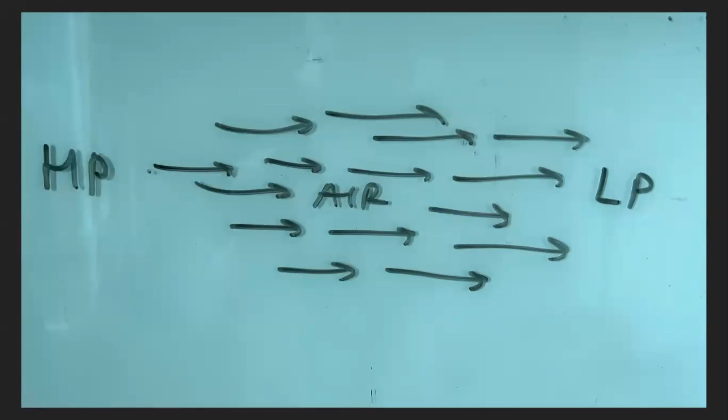To understand the structure of the airplane, we must understand two different concepts in aerodynamics. Firstly, the relationship between pressure and air. A fact we all know is that air travels from areas of higher pressure to areas of lower pressure. Therefore, to deliberately make air move, you have to create differences in pressure. Now, when is pressure higher? Pressure is higher when there are more air molecules making more collisions.

And obviously, when are air molecules going to make more collisions? When the space for the air molecules to move around is less. Essentially, when the volume is less. So, two factors which affect the air pressure are the number of air molecules, which basically means the number of collisions that the air molecules will make, and the second factor is the volume that the air molecules have to move around.

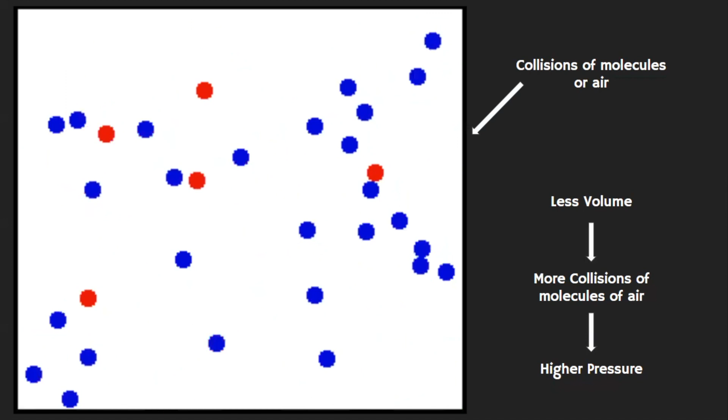The second concept in aerodynamics that will be important to explain how airplanes fly is the relationship between volume and air. Now, when air molecules are in motion and then we constrict them to a region of lesser volume, the velocity of the air molecules traveling increases. Now, to explain that, I will use a real life example.

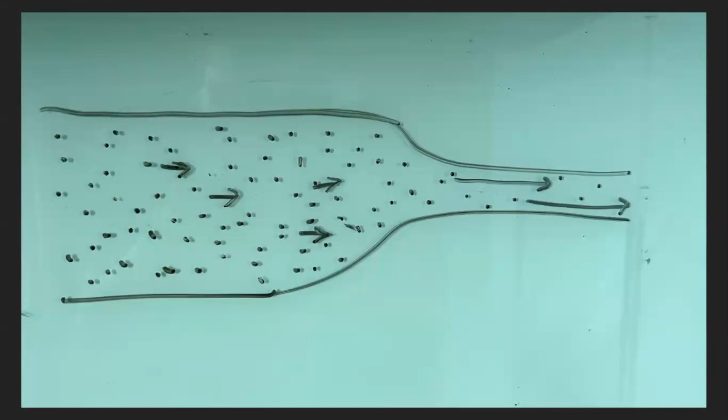When using a garden hose, we put a finger on the cylindrical opening. And then what happens? The water rushes out much quicker. Why? Because we are decreasing the space that the water molecules have to escape the hose. Hence, we are decreasing the volume that the water molecules have to escape. And therefore, water rushes out much faster because we're squeezing it through an area of lesser volume. We're forcing it through an area where it does not have enough space.

Now let's look at another case. When these air molecules in a bottle are being forced through the narrow gap, the neck, they gain velocity and move much faster at the neck of the bottle when compared to the part before. The particles of air at the neck are accelerating, and when they are accelerated, you can see that they're more rarefied. They have space between them. So the collisions between the air molecules decrease.

And if the collisions between the air molecules decrease, then it creates a low pressure zone at the neck of the bottle. And what happens when we have differences in pressure? The air flows from the region of higher pressure to the region of low pressure. So the higher pressure region is where the bottle is, and the low pressure region is where the neck is. So the air flows from the bottle to the neck and out.

So when the air molecules are forced or squeezed through something, they gain velocity, like the water coming out of the hose or the molecules that are being squeezed through the neck of the bottle. And we will see why this concept will matter later in this video. Now, moving ahead with these two aerodynamic concepts in mind, we will see the four forces acting on bodies that are in motion in fluids.

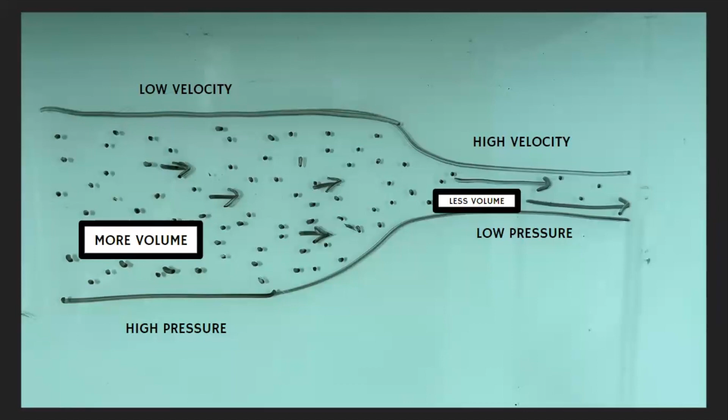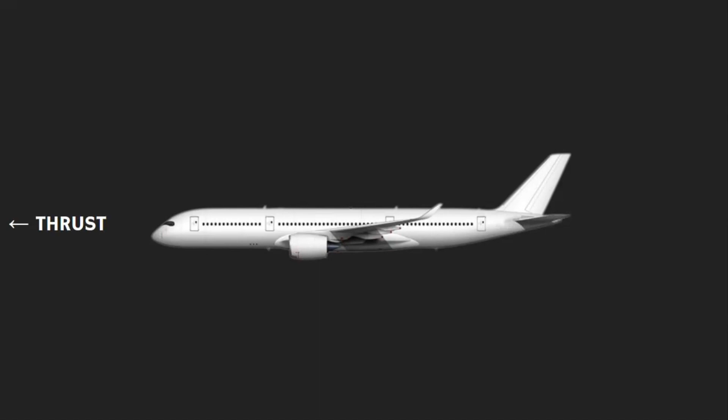Let's consider our body in motion to be our aeroplane that is in motion in air, which is obviously a fluid. So the four forces acting on an aeroplane are firstly, thrust, which is generated by the engines of the aircraft pushing the plane forward. Secondly, drag, which is a resistive force caused by air friction acting opposite to thrust. Thirdly, lift, which is what we will mainly look at in this video. It is a force that allows the plane to fly. And fourthly, downforce, which is another resistive force acting opposite to lift.

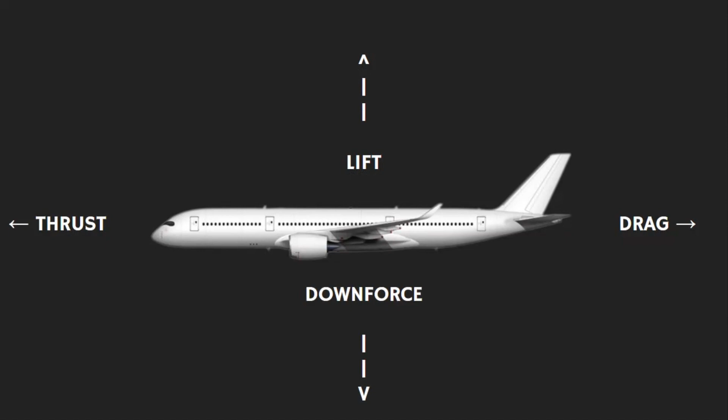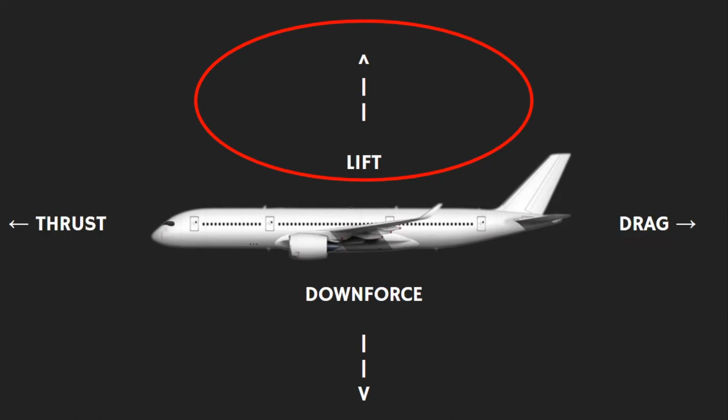Now, the force that helps an aeroplane to gain flight, as mentioned before, is lift. Lift is basically the force that pushes the airplane upward. So it is imperative that the aircraft is designed in a way that it generates lift. We will not cover the other three forces in this video, but they are equally important as they have a great impact on the design of the aircraft. Now, how is lift generated and how does it impact the design of the airplane? The primary way is in the form of wings.

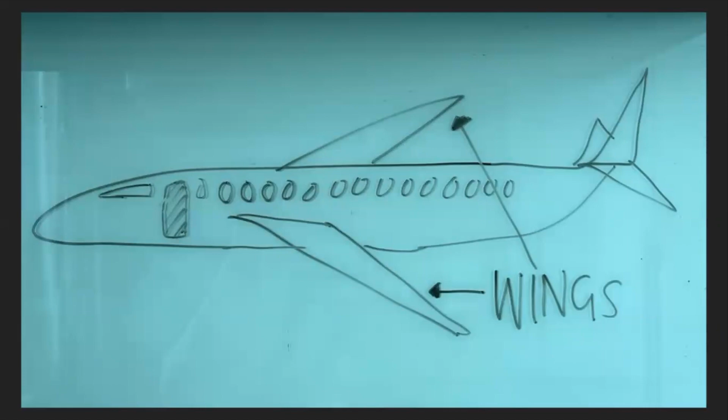To understand what wings are, we must know what airfoils are. Airfoils are structures that produce lift or drag when moved through the air, and the airfoil that is most commonly used is a wing. Now, the shape and design of the wing is responsible for generating the lift for the aircraft. The cross section of a wing looks something like this. Okay, so now how does this design of the wing generate lift?

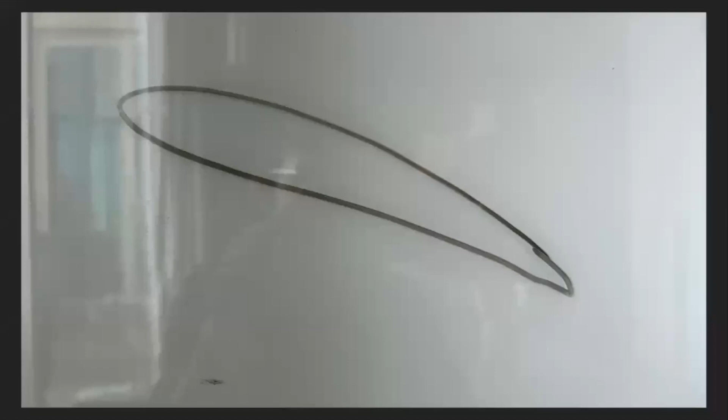Now let's imagine this. This wing is moving through the air. The air will make contact with the wing and the wing will separate the airflow. But how will the wing separate the column of air that it's making contact with? The answer to that question is essentially answering how lift is generated. Wings are designed in such a way that they unequally separate the air that flows towards them and makes contact with the wing, and they unequally separate it above the wing and below it.

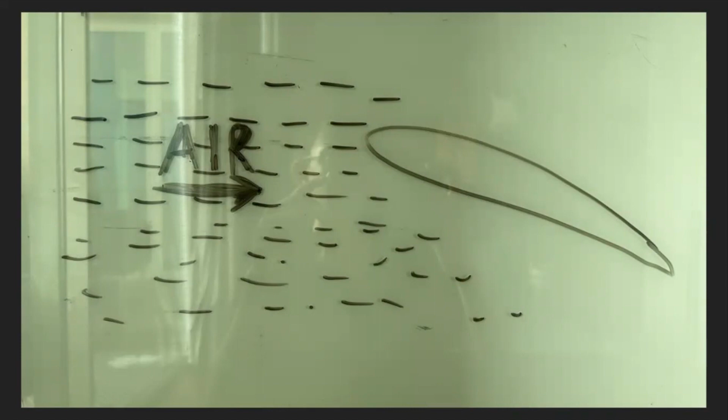So they deviated unequally above the wing and they deviated unequally below the wing. So now, when the air column hits the wing, let's first see what happens to the air that is deviated under the wing. As you can see, the air gets pushed down by the wing in a pretty straightforward manner, as the air flows along the shape of the wing.

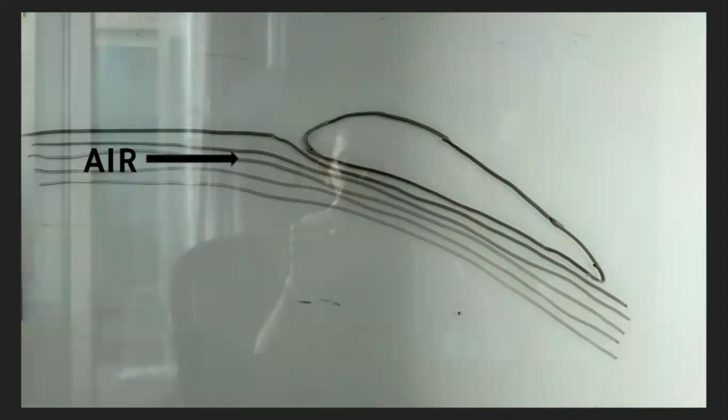But the top of the wing does not have a smooth curve like the bottom of the wing. The top of the wing has a more aggressive, sharp curve. And now let's see how air is deviated at the top of the wing. Now, as you see, at the top of the wing, the air has to take a more aggressive approach around the shape of the wing. And it is deviated at a much, much greater angle than the air column at the bottom.

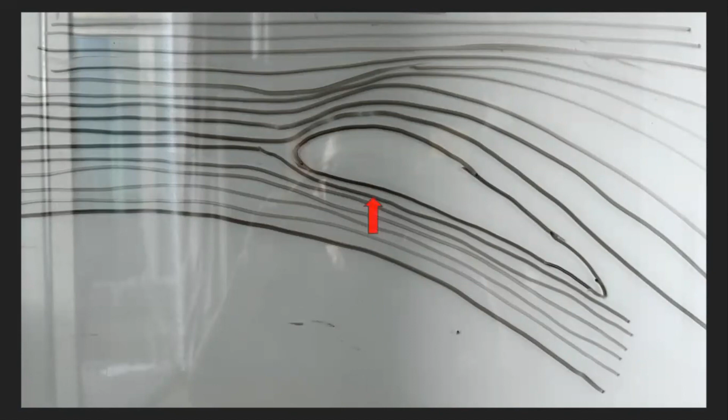This means that at the top of the wing, the air that is flowing is being squeezed between two things. Firstly, the top of the wing, and secondly, the column of air that is undeviated, that is flowing horizontally. So the air is being squeezed to flow between the two red arrows. And from what we've learned before, when the air is squeezed through something, it moves much, much faster. So after making contact with the wing, the air that is deviated upwards moves much faster. And when the air moves faster, the airflow is rarefied, creating low pressure above the wing.

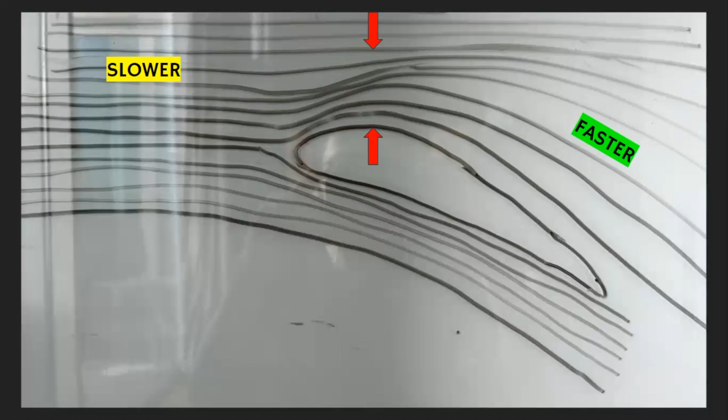And what do we know about differences in pressure? Air moves from regions of higher pressure to regions of low pressure. So the air moves upwards, thereby pushing the wing upwards. And why is there higher pressure at the bottom of the wing? Because when we compare it to the top of the wing, the pressure is obviously higher, because at the top of the wing the pressure is lower because of the airflow being rarefied, because the airflow is being squeezed between the horizontal column of air and the top of the wing.

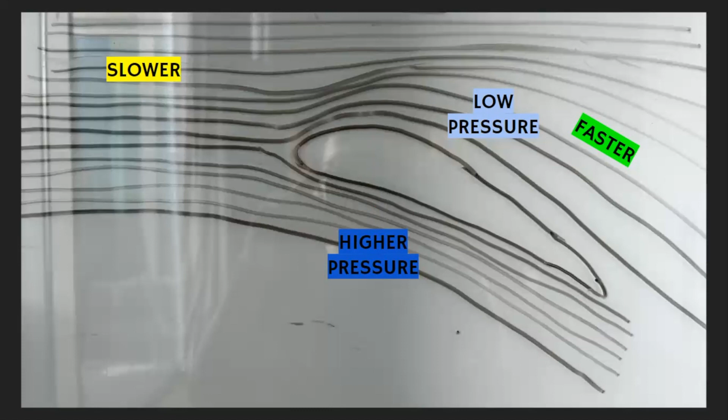Hence, with higher pressure and low pressure, the air pushes the wing upwards. Hence, a force is generated by the air pushing the wing upwards, and that very force is called lift. This lift pushes the wing upwards, essentially pushing the entire aircraft up, allowing it to fly and soar the skies.

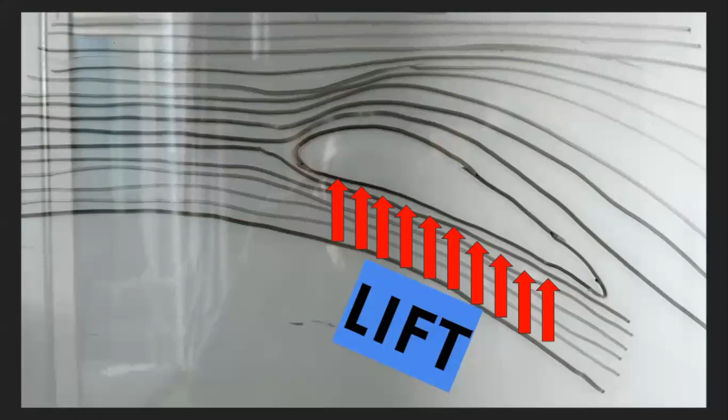Another way that lift is generated is that if we look at the overall deviation of the air after it hits the wing, clearly, as you can see, it is downwards. So the air is being pushed downwards by the wing. And to that, we get a reaction force, and the reaction force is upwards. How do we get that? Through Newton's third law of motion, which states that every action has an equal and opposite reaction. So the action is the air being pushed downwards by the wing, and the reaction to that is the wing being pushed upwards.

So, therefore, through differences in pressure, along with the reaction force on the wing, lift is generated. This lift pushes the wing of the aircraft upwards, which pushes the entire aircraft up, which basically enables it to fly. And that is why the design of the airplane generating lift is so important.

There are also certain other ways in which we can increase the lift force produced. Firstly, by increasing the speed of the aircraft, which is done by the engines, which generate thrust, one of the four forces we mentioned before. So if the thrust generated is higher, if the velocity of the aircraft is higher, the lift generated is more. Therefore, the aircraft can fly higher. This is why fighter jets, which travel at insanely high speeds, can perform maneuvers that passenger jets cannot, because these fighter jets have much more powerful engines, so they generate much more thrust.

Another way we can increase the lift is by changing the angle of the wing. Because the more aggressive the angle is at the top of the wing, the greater the angle of deviation of the air, and the more the air is going to be squeezed. So the greater the difference in pressure, and hence the more lift that is going to be generated. Now, we have certain devices on the airplane that can help increase the lift generated in the two ways we've mentioned above. Firstly, we have flaps.

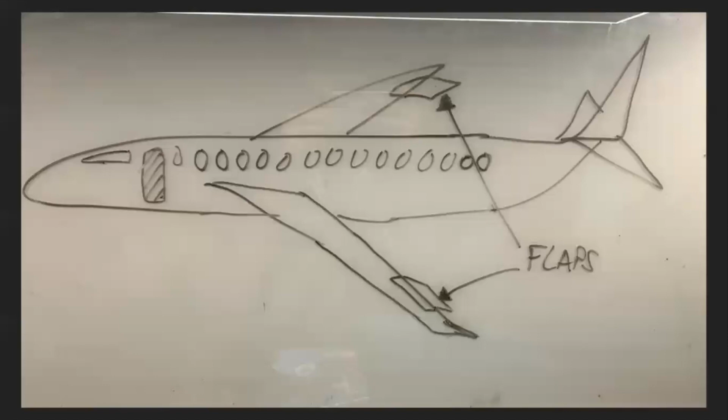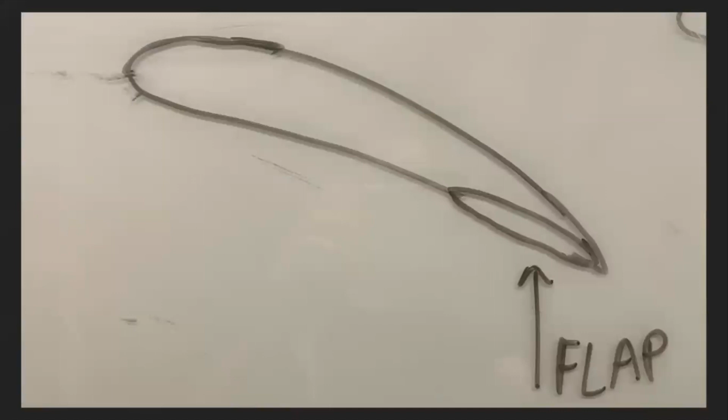Now, how do flaps work? Flaps are devices on the wing that get activated when the plane is taking off or when it is landing. When taking off, these flaps extend, therefore increasing the angle, separating the air even further, creating a greater difference in pressure, and therefore generating more lift. This extra lift that is generated helps the plane while taking off. So flaps essentially change the angle of the wing.